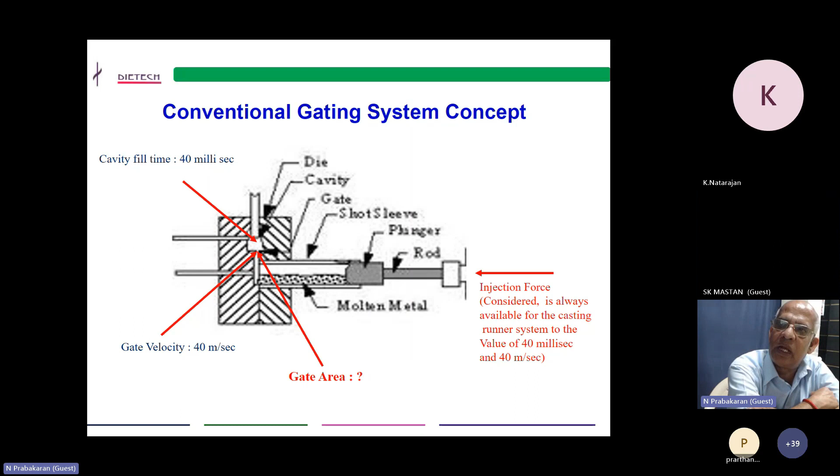As per the sketch, in the previous conventional gating systems the injection force is not known, but we assume it will be produced by the machine. This is a big gap between PQ square and the conventional gating system.

How normally do we come out with a gate area? Everybody knows the weight of the component; from the weight of the component, add the overflow weight, and if you want, add the chill path weight also, then come to the volume.

We find the weight by density. From weight by density, we find the discharge rate, that is the fill rate. Fill rate is nothing but volume to fill divided by fill time.

Fill time, as I told already, in a conventional system we think only 40 milliseconds, and gate velocity is 40 meters per second. From there we can find the gate area by fill rate divided by velocity of the gate, which we are assuming as 40 meters per second. From there we can find the gate area required for that component.

With all these standard calculations, one thumb rule we've found: the gate area in square mm equals the weight of the casting in grams divided by 4. This is just a thumb rule we adapt, to see by the component how much the gate area will be. Suppose if it is 200 grams, then 200 grams divided by 4 gives 50 mm square as the requirement of the gate. This is a rough thumb rule we can have in mind.

This also can be used. These are all methods that we followed in the earlier stage before coming to the PQ square diagram. One more thing - probably at the design stage itself, we know what the fill time is according to wall thickness and according to weight of the component, the fill time will get changed. Suppose we are having a 3mm wall thickness on average inside the casting, then we will standardize at 40 milliseconds. If it is more than 3mm, then we will go for more fill time, say 45 or 50.

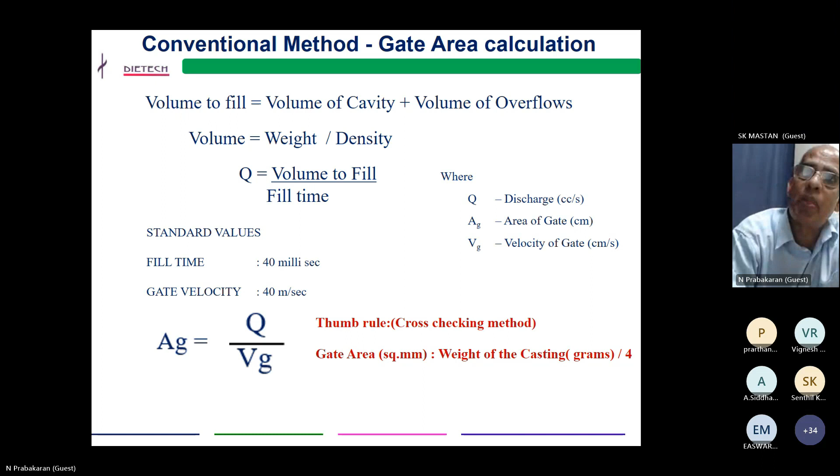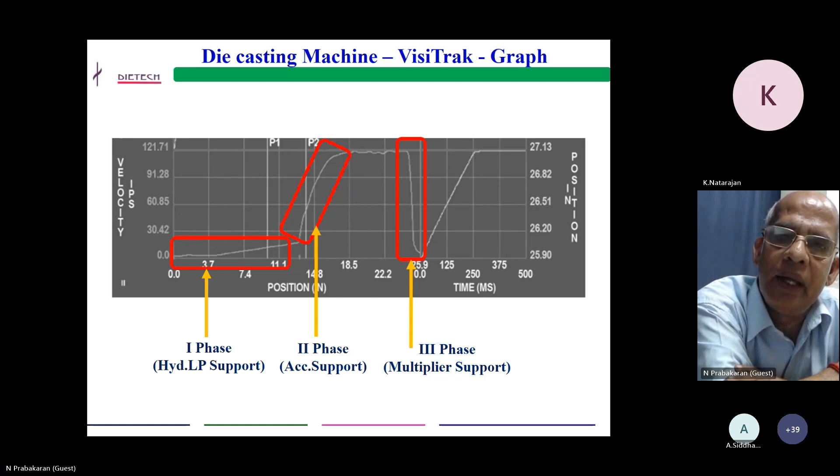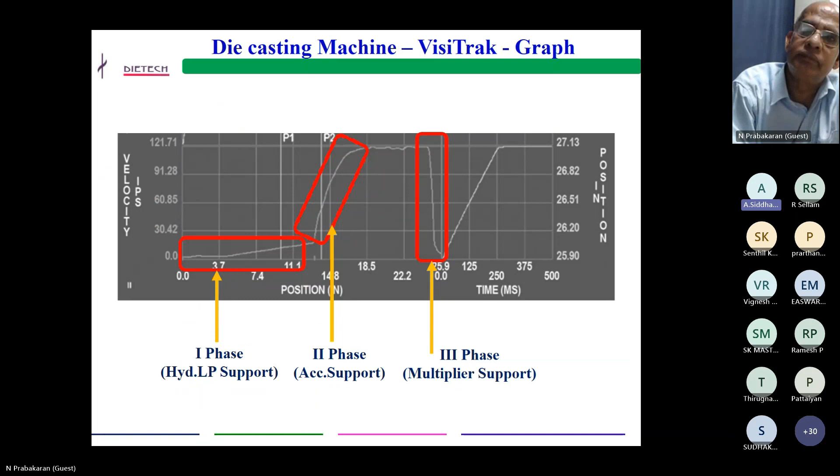So what is in the PQ diagram? What are all the machine elements involved in the calculation? That is what I am now putting inside. But one thing - a big understanding that probably people know - however I am going to highlight it.

We are considering a piston area - that is piston area, hydraulic pressure inside the piston area, and we are thinking of dry shot velocity. Dry shot velocity is nothing but with no material - the plunger is very free - at that time, what is the maximum velocity that the machine can create? Probably we will try to find out if we have an attachment on the machine, a sensor having a velocity sensor, or otherwise the machine supplier will feed this data. Dry shot velocity - probably the supplier will give the data for us to calculate the PQ square diagram for this purpose. And then what we call the plunger area and the plunger pressure - plunger front pressure maximum. So that is what we call the pressure in front of the plunger. Okay, these are all the elements which we are considering in the PQ square diagram.

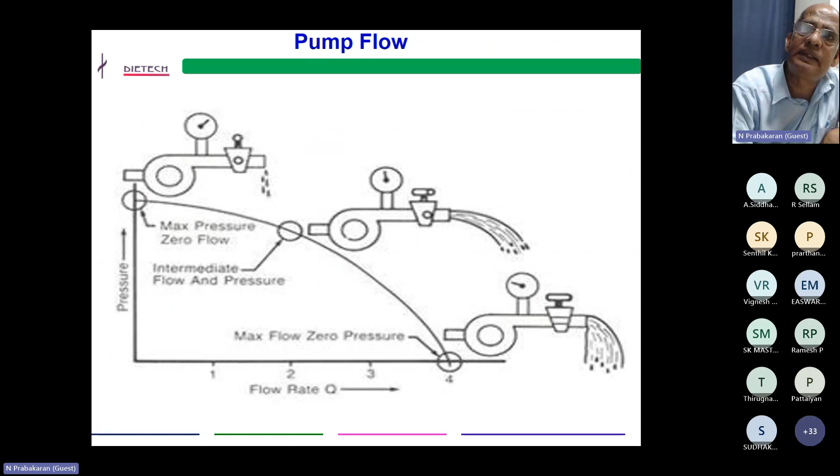How to calculate the maximum flow rate? As I told at the beginning, the dry shot velocity is taken into account. Dry shot velocity into area of the piston, that will give the cc per second. The A is plunger area in square cm, and V is the maximum dry shot velocity. Between these two we will get the maximum flow rate.

Normally, if we are thinking about what we apply, the plunger velocity will be 2 to 3 meters, and probably the dry shot velocity will go up to 7 meters per second. This is just a rough estimation I am giving. Normally we operate from 1.5 to 3 meters per second, but in dry shot velocity it will almost be doubled. You can take this as a rough calculation, it will be twice what we are using in the machine. That is normally the dry shot velocity for rough estimation.

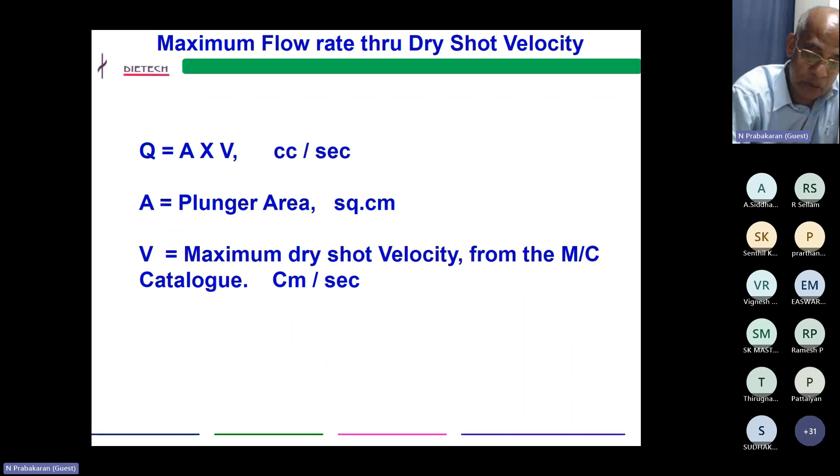Now we found out the static pressure and put that point, and found out the maximum flow rate. So you draw a line between these two. This is the first line, what we call the machine performance line, the maximum pressure and the maximum flow rate.

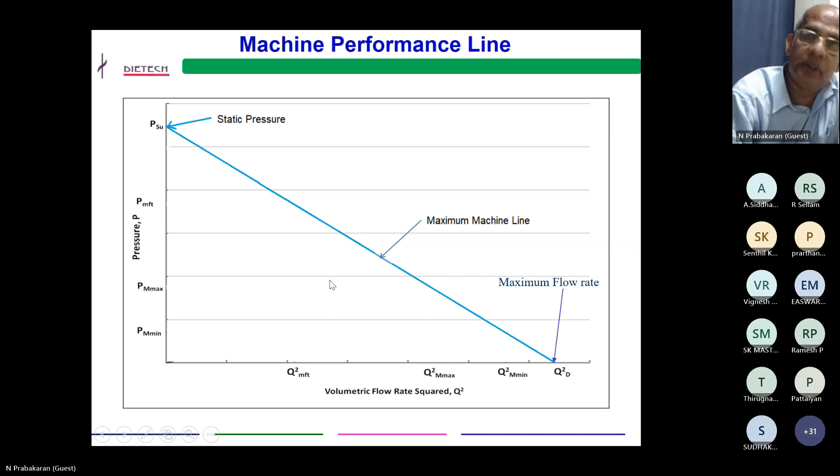Now earlier, in conventional methods, we were only assuming the filling time is 40 milliseconds, and one more variable, according to wall thickness, it can be more or less. This is the estimation we used to do. Here, in case of a PQ squared diagram, the fill time is taken into so many factors.

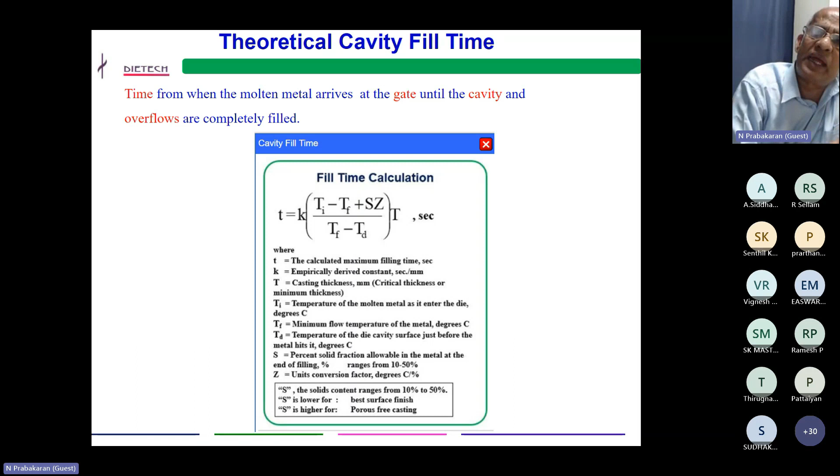So what I want to convey to you is that cavity fill time is calculated through so many factors. It means it has taken the die surface temperature, metal temperature, and metal minimum flow temperature, and also, what I can say, solid fraction is getting into the picture. So probably we are nearing the accuracy, what I want to convey.

Before, conventionally, from the previous figure, we are trying to approach very near to the practical factor - practical, even what I can say, practical gate velocity. We are nearing the practical gate velocity by calculations.

So one more thing, what I told, this is a fill time. Now there is a theoretical discharge. You know the weight of the component. From the weight of the component, then after the gate we'll have to take - suppose you can add overflow or tip path - and then from there we'll have to find out the volume by fill time. Already we calculate the fill time, we know the volume. From there we can find out the theoretical discharge line.

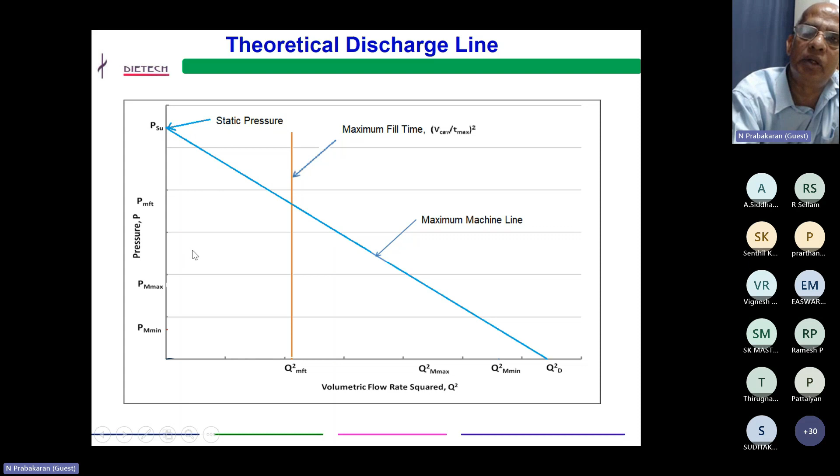Next, we'll go there. Another interesting thing, what I know, this is normally in die casting, it is going to be a 40 meter mean value. Probably it will go up to 60, or we can go for 35 or 30. So now we have taken the standard value of 40 meter per second and 25 meter per second. Suppose if we want a thin component, even we can fit it for 50 meter per second and 30 meter per second. So this value is according to the component, we can fix this velocity and then draw a line here.

But we don't have any velocity scale here. It is only pressure scale, Q square scale is there, but we know only the velocity scale. So how can we convert this velocity scale to pressure, what we call Bernoulli's equation. You don't need to worry much about that. The kinetic energy, what we have here, this is called the kinetic energy. Now we are trying to convert this kinetic energy to pressure energy for the plotting purposes in the graph.

Now this is called what we know as Bernoulli's equation. Here we have velocity, and I'm also going to talk about the coefficient of discharge. This is density, and this is pressure. So this velocity energy is converted to pressure energy - kinetic energy is converted to potential energy. Here 2G is the gravity force, and rho is the density.

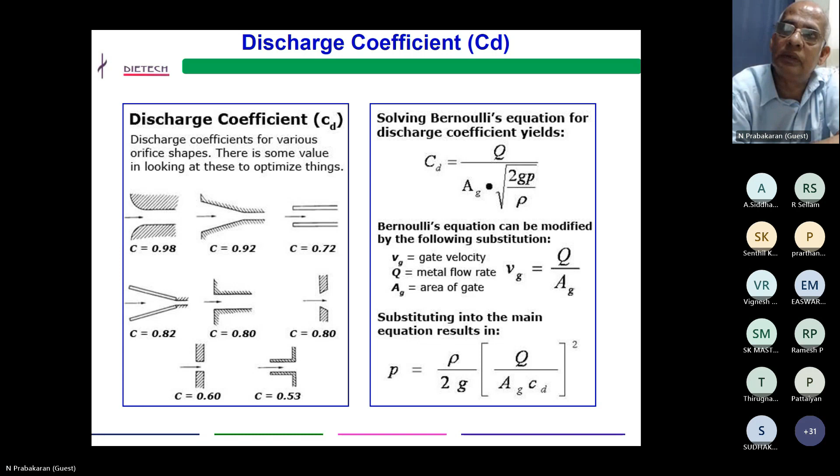What it means is you are having more tolerance. Suppose a component has a 5 micron tolerance, you will have a problem. Suppose we have a lot of problem making 5 micron - if you are giving 0.1 tolerance, then you will have more flexibility in making them. So that way, the machine's capability of making the PQ square is helping to make the process window for that particular machine. That is the main advantage of that.

What we call it - suppose you select the center line, center point of that, draw a line from that - this is called a die line. So for this line, we can calculate and bring from the PQ square diagram, these values will come. What are all the values selected? These are all not much, but one more thing, I will come to the metal pressure.

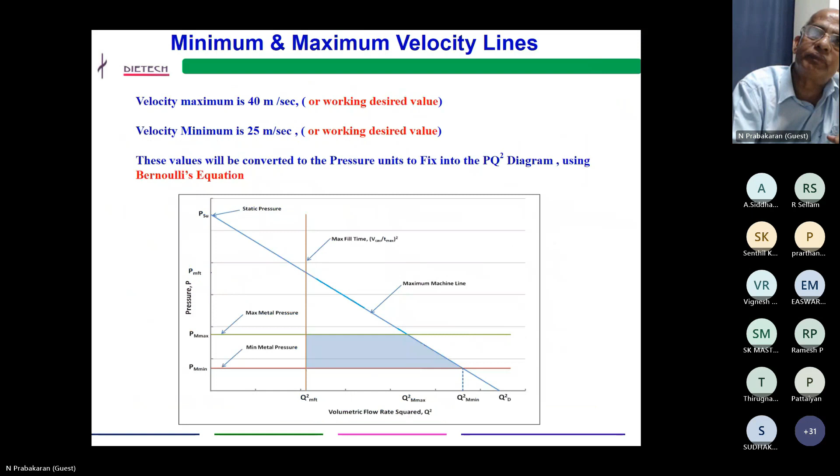So now we will come to the metal pressure. What is the metal pressure? What exactly is happening here? This is not related to the specific injection pressure, which is created by the multiplier. This cavity pressure - suppose we are inserting the material inside the cavity, we are trying to send the material inside through the gate. Here, the energy is converted - this energy is coming to kinetic energy and then pressurizing here at the gate.

This will be converted to two-way energy. One is kinetic and the other is pressure energy. Because of this velocity, the energy created inside the cavity is called cavity pressure. Once the cavity is filled, only the multiplier will come into picture, that will create more skews inside the cavity.

Now, what are all the variables we can use? Suppose I want a higher velocity, since I only have 2.5 or 2 mm wall thickness, you can select a point with more velocity. This means the gate area has to be reduced, and the flow rate has to come down, but the pressure will go up. So this calculation helps us understand all these things.

Suppose I give one more thing, I will explain the variables. What are all the variables which we can handle in the PQ square diagram?

Now you can see there's a small plunger. There will always be a machine with 3 plungers, probably a mid plunger, then a small plunger and a big plunger. Probably we'll take 2 cylinders. How does the PQ square diagram vary? Suppose there's a small plunger and a larger plunger.

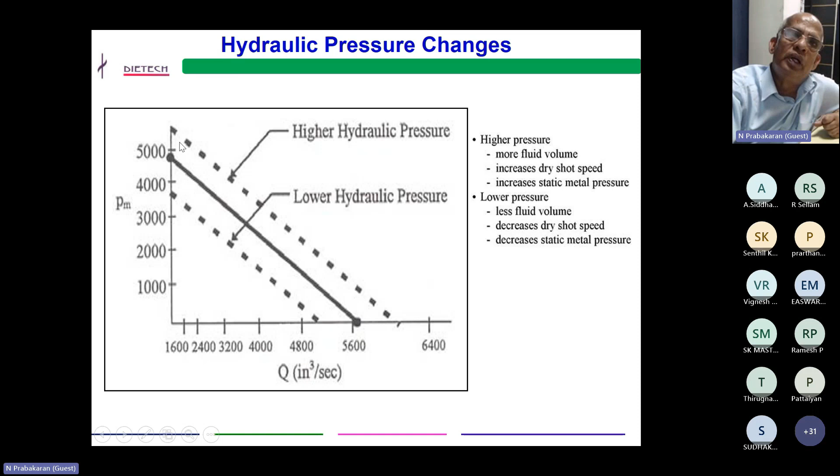For pressure tight components, always select a smaller gate area to get the advantage of cavity metal pressure. For a larger gate, in decorative or engine components, we can select a larger gate area. We'll have fewer problems with timing. So these two things also we'll have to understand and work on them.

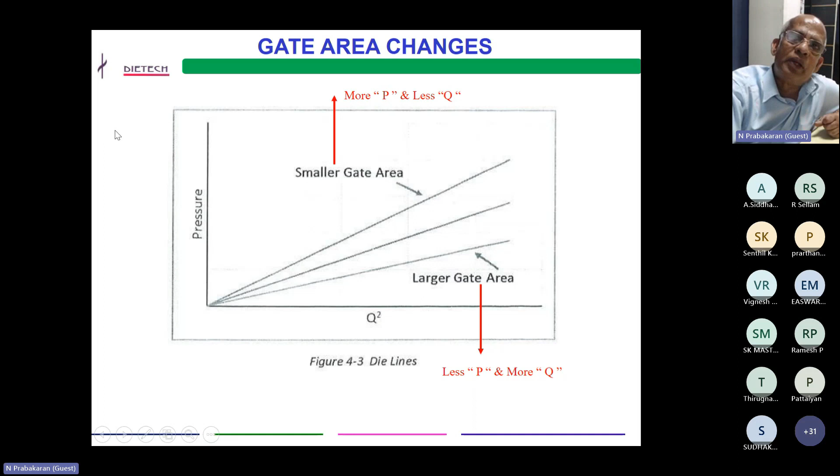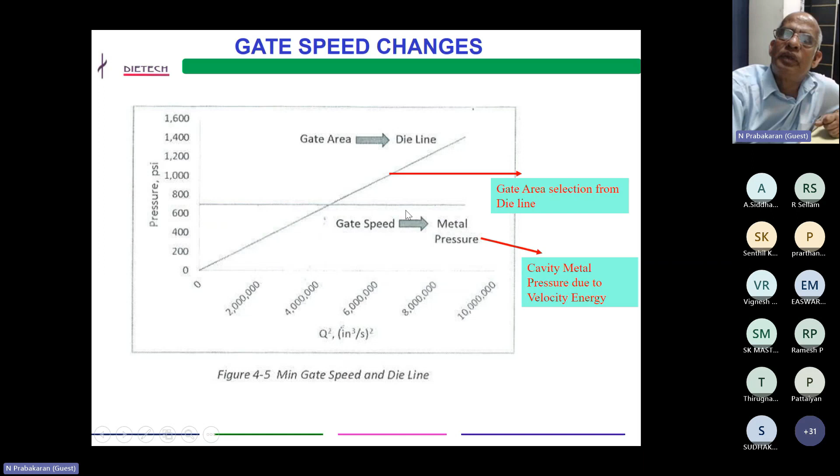So as I told the PQ square diagram, this is a gate area selection from die line, and this is a gate speed general. It is only giving some of all the lines it is plotting: gate area selection from die line, cavity metal pressure due to velocity energy. These two things are made in that.

So as I told, this is a fill time line, this is a gate area line, this is a gate speed line. What we did in the PQ square diagram.

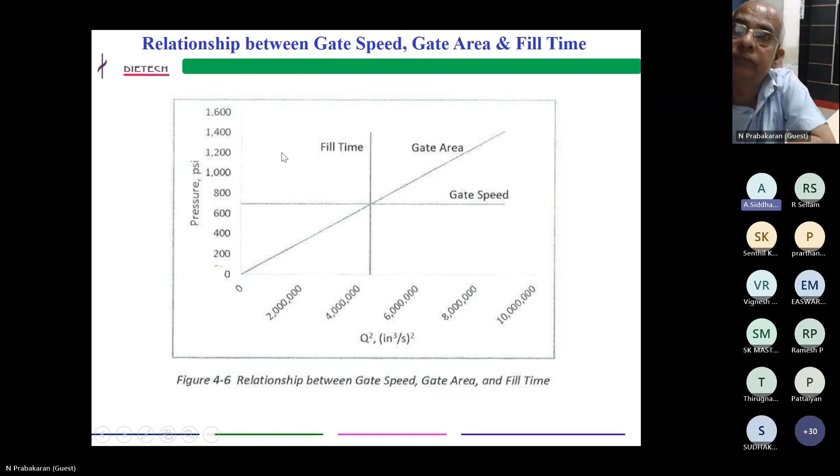Am I audible? Yes sir, you are audible. I have a fundamental thing to ask. Not simply, the Bernoulli's equation is valid for liquid flow, but the filling.

Yeah, that's what I told you. No, yeah, the CD is a real value. Suppose if it is liquid, it will be 0.8, 0.9 and all that. If you're going to slurry, it will come down to 0.5. So we treat it as a slurry there crossing the gate.

I already told you earlier, it is not a liquid, aluminum itself is not liquid, high density. So normally water is 1, fluid is, even hydraulic oil are also within 1, 1.5, 1.2. But as per the density of the aluminum is considered 2.7, it will become 2.5, 2.3 as liquid aluminum. The density is more, and as well as the slurry is formed near the gate. So all these things make the CD value get down.

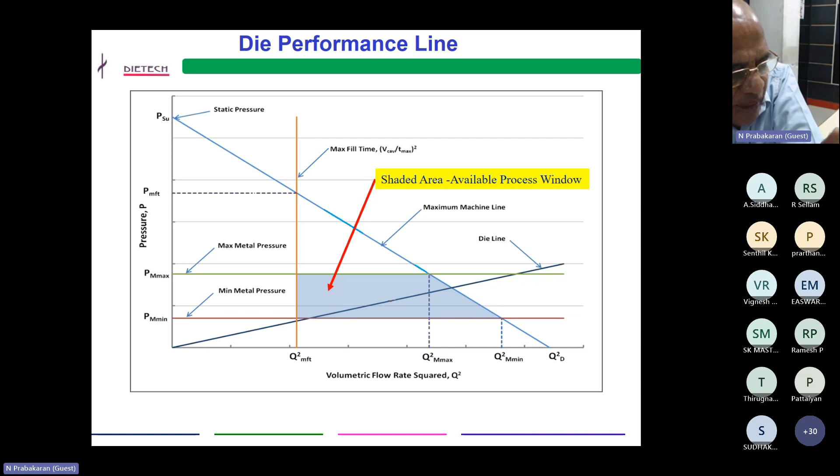That is why NADCA has already given that 0.5 is the standard value for aluminum discharge efficiency near the gate. Probably now simulations have started coming to find out the CD value. Flow 3D has already given that. We are also working on that, that will be given after 3 or 4 months. I will give a paper on how we can calculate CD value from the simulations.

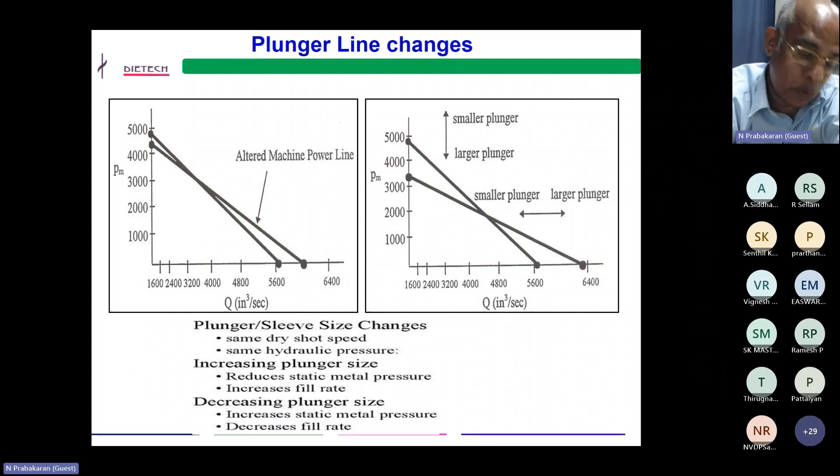So we are trying to make, after the gate, a coarse particle flow, nothing but a slurry. It is going to come as a slurry. In this slurry, there will be a percentage of solid and a percentage of liquid.

Certain times, people will succeed by making an atomized flow, reducing it almost to where all the material is thrown as a powder.

So if the powder starts coming, on the die surface you can clearly see the aluminum material will stick very strongly, and the soldering effect will be very high. So these things happen in case of an atomized flow, but the porosity will be less.

Even I have experienced this. One die caster, I made the die, but they made it as an atomized way - that is making 5 meters per second.

They started, this is a vibrating mounting, engine mounting bracket. They started giving more, 5 to 6 meters per second - whatever the machine speed was there, they started using it. The die life has gone very bad, but according to that, they could produce a component with a little soldering and all that, but nil porosity.

This is characteristically coming probably in atomized flow. All the air will get away from this because of the small droplets, and then there will be no turbulence - high speed, all the air gets out of that. So sometimes people started using it.

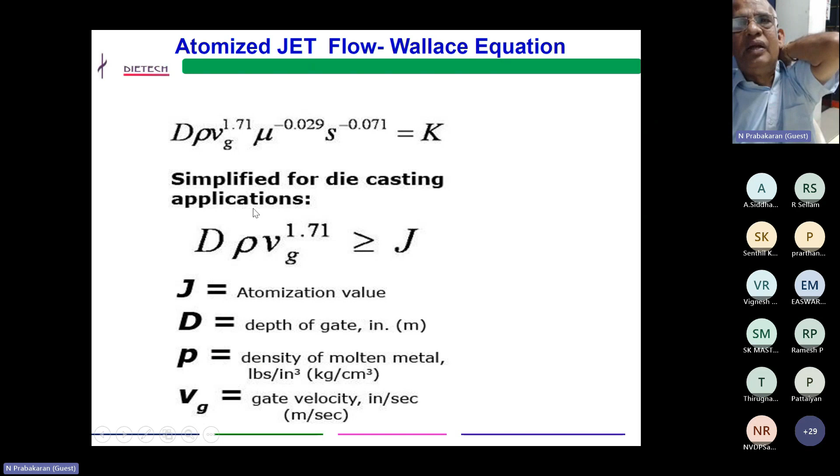This is predominantly NADCA. Probably jet atomization value, and the depth of gate, the density of molten metal, gate velocity - all this is put into the picture. Then we will get the J value. From the J value, you can tell what is happening inside the die.

Before making the die, what would happen? We can judge that. Probably this is also having a lot of calculations. I am only picking up from NADCA and presenting the concept to you. I do not know exactly - we are also not calculating this type of calculation and all that.

We are trying to find out what is the solid fraction and what is the liquid, based on the flow theory recently introduced. Please try to find out the CD value, because that's going to be the breakthrough - only then will your calculations start working for the die. The CD is going to affect things more and more, whether it's 0.7, 0.4, or 0.3 - that is, 30% or 50% efficiency, which is very bad actually. But in India, aluminum processing, it is happening. So we want to find out what will be the solid and liquid fraction. Probably the CD value can be fixed, and from there the calculation of PQ square will give more practical value.

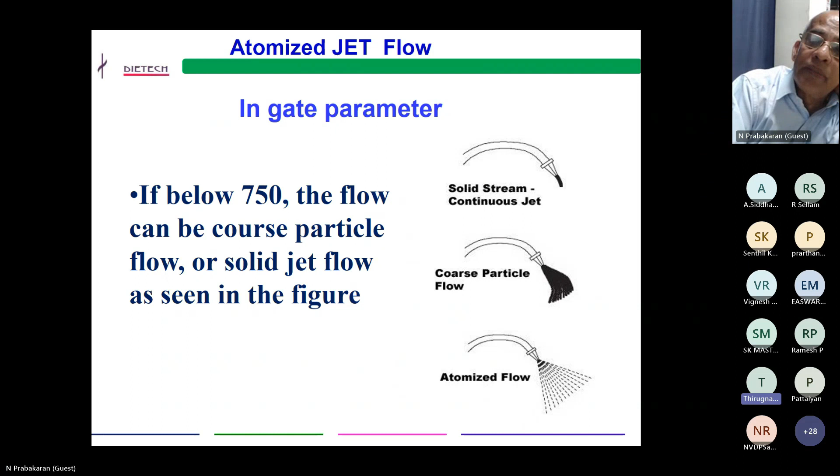Thank you. Any other questions, please? From the audience?

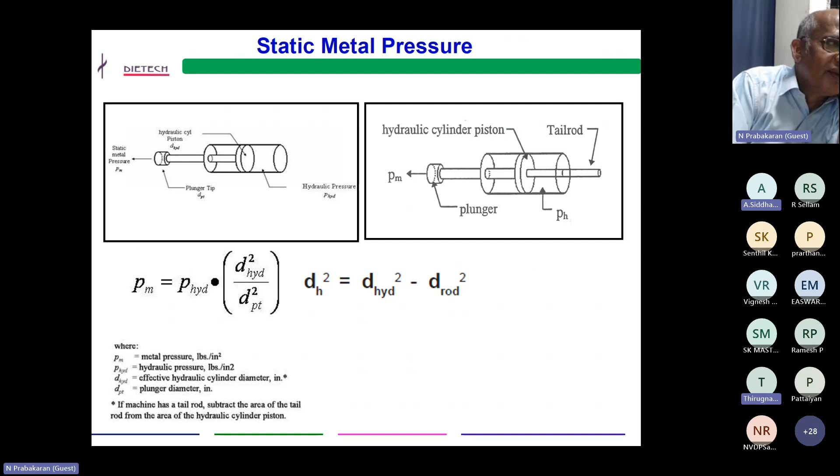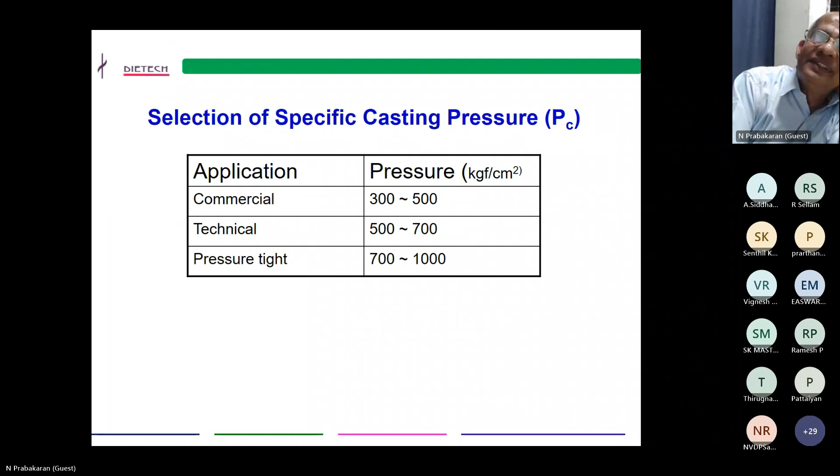Anyone else, please feel free to open up and ask questions. Even if it's a small question, please ask so that at least you understand the concept. I'm not talking about calculation or something like that - just the concept, whether you got it. That is the main idea behind it. This paper is only to make you feel the concept.

Sir, unmute yourself, sir. Am I audible? Yes, sir. I mean...

Is it necessary to take the PQ square diagram for the machine every year?

Every year - what I am saying is, in the hydraulic line normally you don't have a problem unless you are able to maintain the pressure and measure the pressure on the plunger area. If the pump pressure and plunger area can be measured, this will not get changed. It is only a rubber item sliding in the bore. Actually, the problem is the alignment of the injection between the shot sleeve and the plunger rod, as well as the condition of the shot sleeve and plunger clearance. These three have to be maintained, and every month you can check the alignment. Nowadays calligraph tools are available to check shot sleeve versus injection position alignment. Some machines have adjustable settings, so there we have to be very careful. If the machine is fixed, like Toshiba machines, they don't even have variable injection position, so we need not worry much about that. But in case of HMT and other machines, they have 2 or 3 injection positions - that is the problem for you. So you will have to check the plunger alignment with the shot sleeve, the condition of the shot sleeve and plunger, and then the dry shot velocity you are planning will come out correctly.

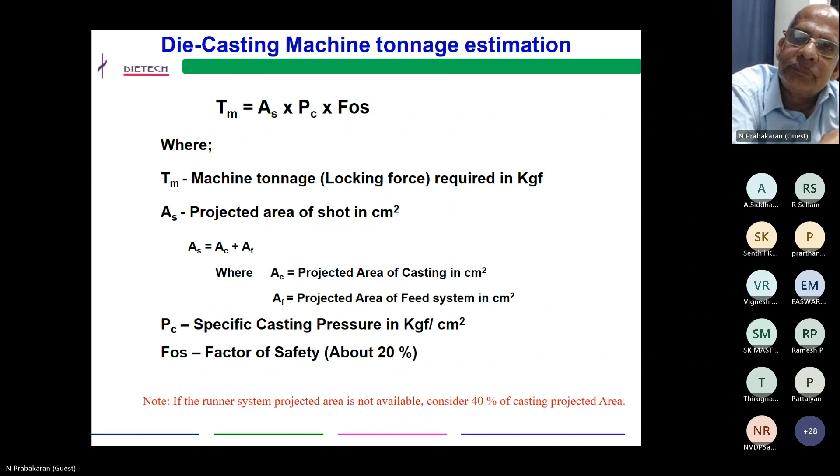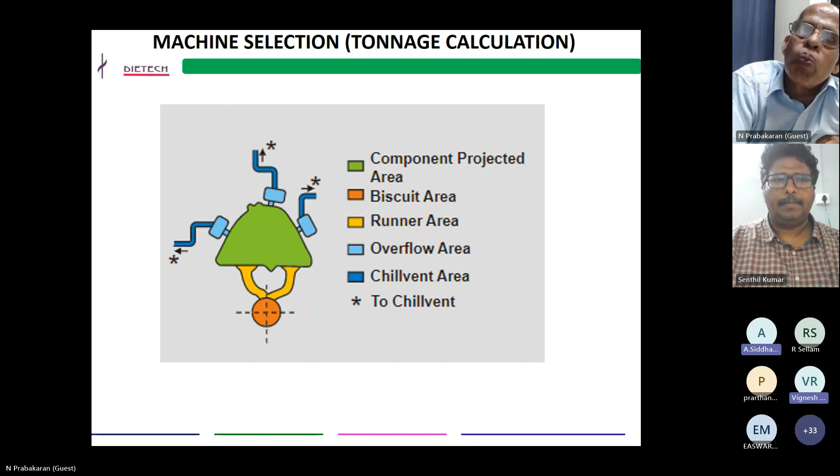Sir, there are some more questions. Somebody has raised their hand. Please, NVDP, Sandeep Rutala - you can unmute yourself and ask, sir.

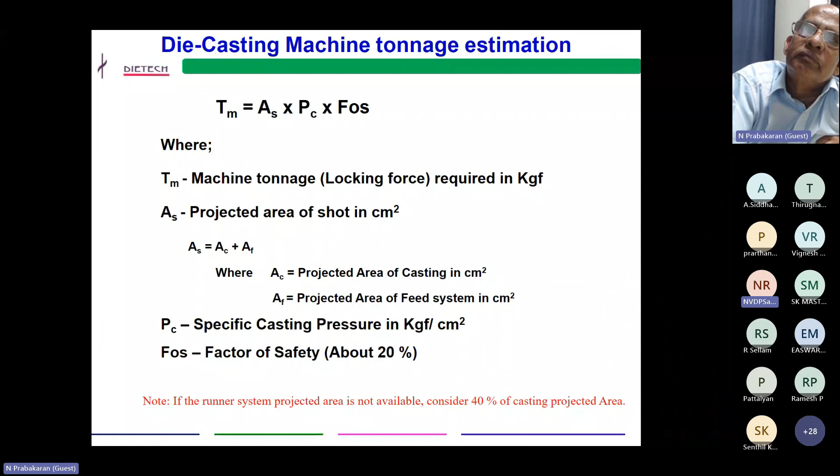Yes, sir. While calculating this tonnage, while selecting the machine tonnage, I have also seen some calculations with the sliding core, with a wedge angle. So why is that not used here? I've already told you, yes.

So why is there a difference of 21 degrees and 5 degrees for mechanical and hydraulic? The component you are applying - in the side core you apply pressure, but locking in the opposite direction. Now, against that plate axis, we are applying the core pressure in the opposite direction - that's a 90 degree relation. So for that, we stop with either one wedge, and that wedge angle gets varied. Mechanical core is 21 degrees, or 18 to 21 degrees, and hydraulic core is 3 to 5 degrees.

So you mean to say the mechanical core should have the 21 degree angle? 18 to 21 is normal.

Okay, 18 to 21, why? There is a mechanical core action. If you go below 18, you will get stuck, the mechanical core finger cam will come. Because we selected 18 to 21, the force acting on the cam should be optimum in the case of 18 to 21 degree. Suppose we increase or reduce it, the finger cam action will have more force on the finger cam. That is the optimum force, the 21.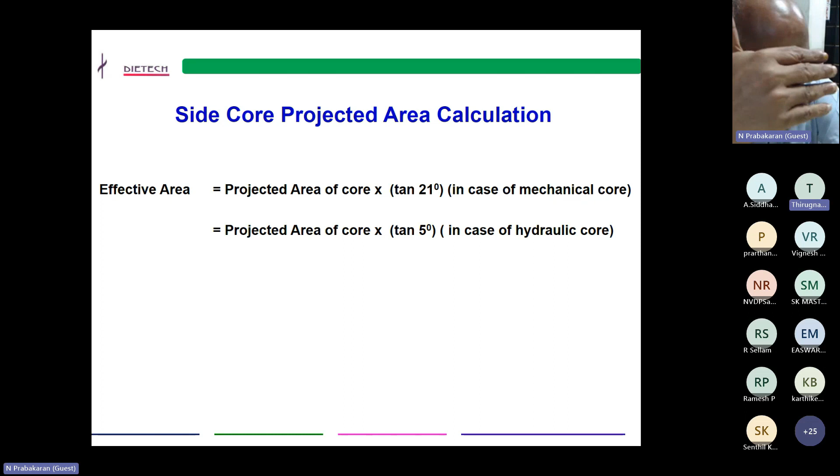But at the same time, you are going to transfer some force along the wedge locking, die locking, tonnage locking, whatever the die parting against that. In case of 5 degree, the force will be less, in 10 degree it will be more. But the advantage of 10 degree is the releasing is very easy. 5 degree has some friction.

So when we are putting a 10 degree, your value of projected area on the core will be becoming more. So in turn, the tonnage will get raised, requirement tonnage will be more. Yes, I agree. Okay, so that is what, so we are compromising by way of tonnage.

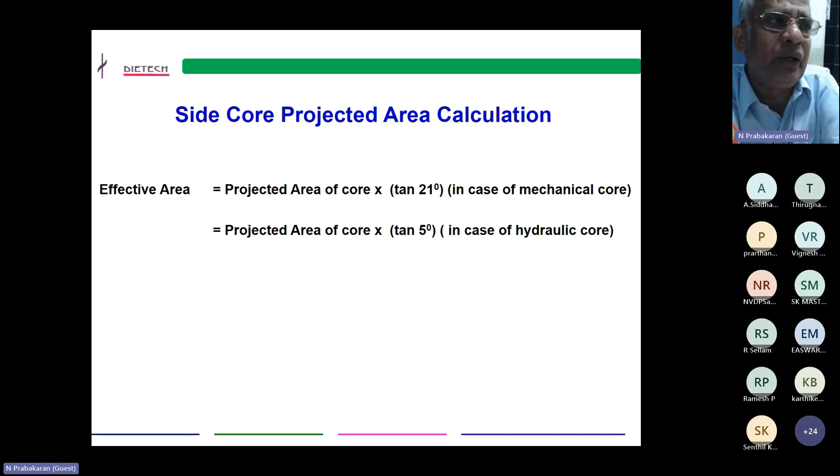If you are reducing the angle to 5 degree, even some people are using 3 degree to get the advantage of tonnage. But the friction will be more. That's the main thing. Probably that wedge has to be nitrided or given some other treatment, ground and then nitrided. These are all the requirements for a 3 degree wedge. 5 degree will normally be a milled surface with a little grinding, that's okay. If you go with 10 degree, probably a milled surface directly will work, with polishing and all.

Yeah, okay, thank you. Any further questions? Yeah, one more question from me, Prabakaran sir.

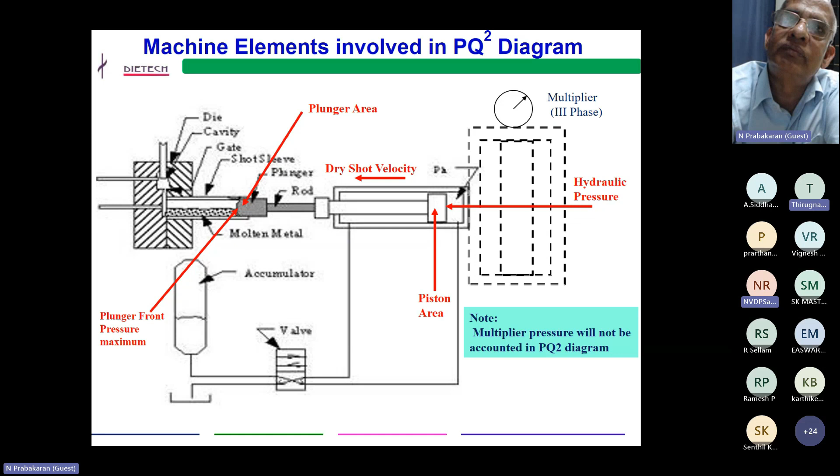So while considering this PQ square diagram, it's purely theoretical. So how far can we say for a given die, if the process point is within the operating window, at the middle of the window, how far can we say it's a stable design or a very good design?

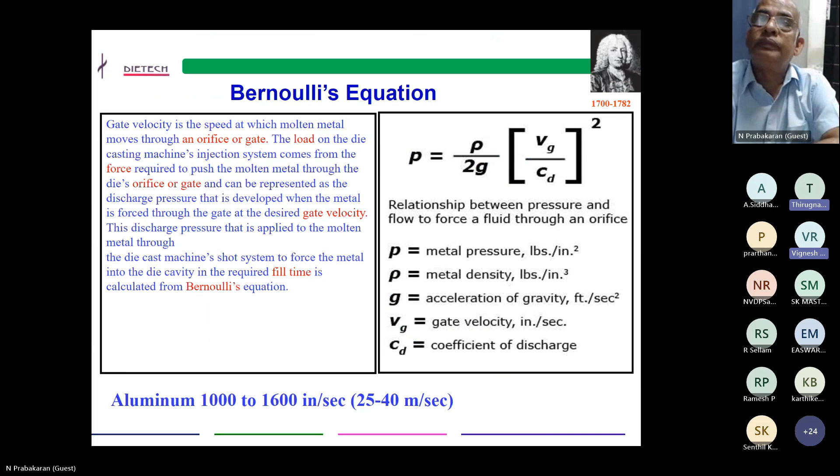I will come back. So still they are having a doubt. Actually, the PQ square diagram is not telling only the value, but the input is given from you, from the machine.

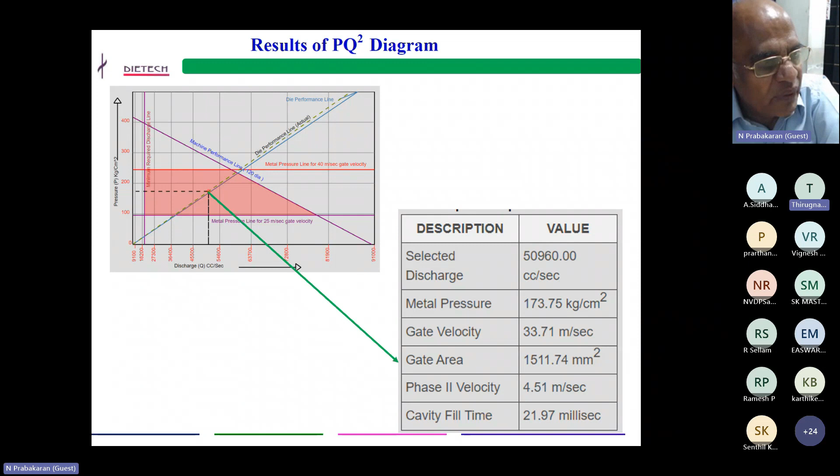If you could be able to maintain the dry shot velocity, what you are giving, you could be able to measure and then give the value to the graph. Number one. Number two, consistency of maintaining the pump pressure. Number two. Number three, what I am saying, the gate area is not going to be given, only it is going to be calculated from the PQ diagram. So dry shot velocity, normally the problem we are facing is the velocity what you are deciding is not coming.

Suppose if I am saying that a particular die is designed for this gate area, but probably it may fall here also, or fall here also, or something like that, even it will go out. What exactly happens? Suppose the point goes out, what does it mean?

What is the meaning of this graph? Whatever the value you are giving is the machine performance line. Suppose your point is coming here, what it means is the machine performance line, your machine performance is not equal to this line. So the real problem today is only the CD value what you are assuming. All others are true values which you are only giving them.

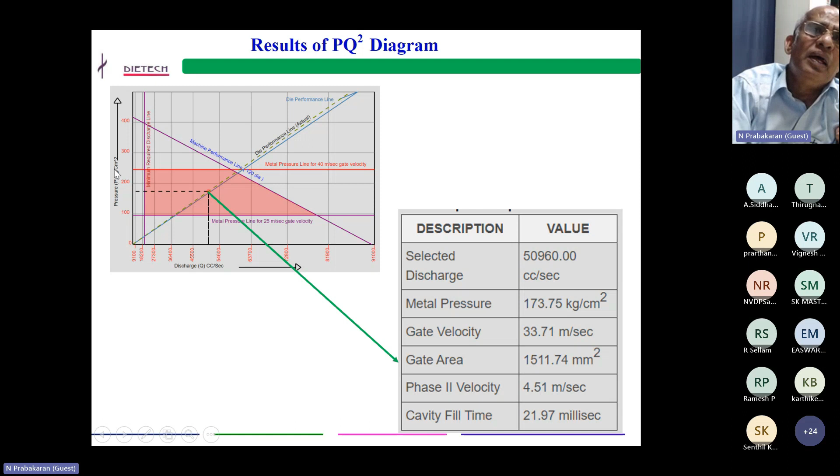Suppose you want 40 meters per second, so if you want 50 meter per second, you can put the 50 meter per second line. If you want only 25 or 30 meter per second, you can put the 30 meter line. You are only describing the PQ square diagram. And this vertical line what I am showing, I told you, the vertical line is coming from the component. You are not deciding it, it is coming from the component. What is the weight of the component, or after the gate what is the weight of the component and the volume. Based on that, we are finding out the maximum fill time.

This is decided by the component, and this is where we face a problem only the machine performance line can help find. If you make more accurate practical values equal to the fitting value in the graph, you will get that line. Apart from that, today's gap is the CD value.

That CD value we are assuming as average, 0.5 for aluminum metal transferred towards the gate. Now flow simulations have started coming. Please try to use the flow simulation to find the particular gate's CD value, fit it to the graph, find the gate velocity, you will be benefited. Probably there is a practice, but what I am saying here is, going blindly, suppose my point is...

If I am selecting a point here, my error, even if it is there, will go a little here or a little here. The practical value will come here. Suppose if I go blindly and put a point here, the component will get rejected since it is not coming inside the performance line. The component will fill with a lot of defects.

Suppose we are going below, that's another problem. So try to fit the curve, find the center, put the value of gate area according to this, then whatever error you are making will be substituted with this process window. This is the idea behind it.

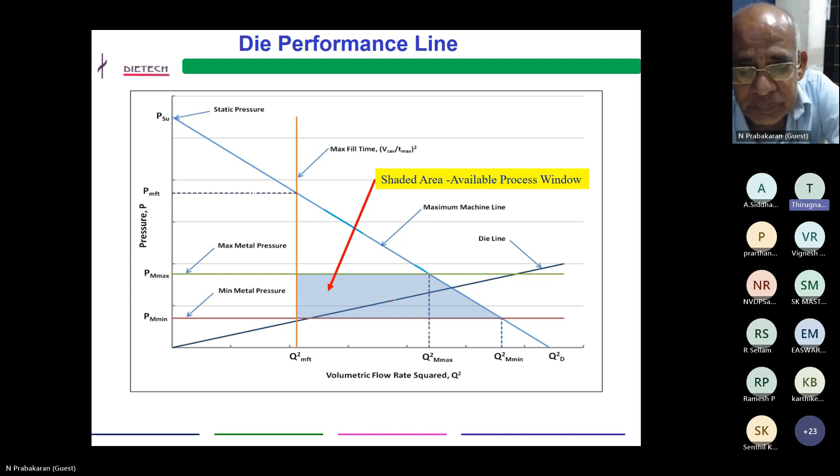Any other questions, please?